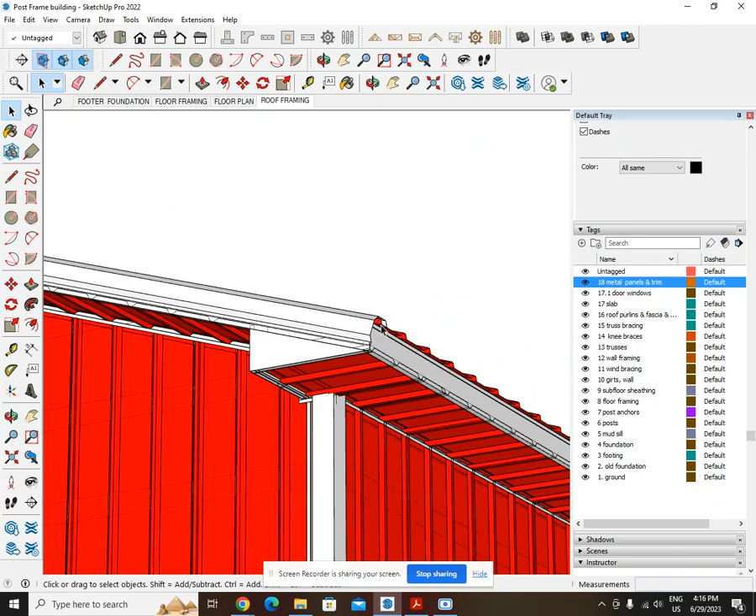It's June 29th, 2023, and I'm showing the plan for this post frame building. Earlier, the only thing that I had done on this post frame building was up to this point in the model, just showing the framing, the foundation, etc. Well, now I have the metal panels modeled in, and I've also got the plan modeled in, which we'll go through page by page, okay?

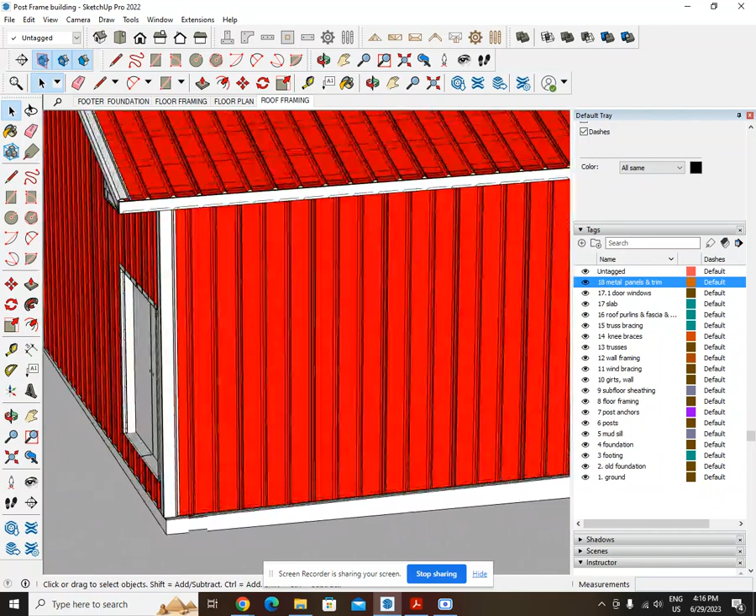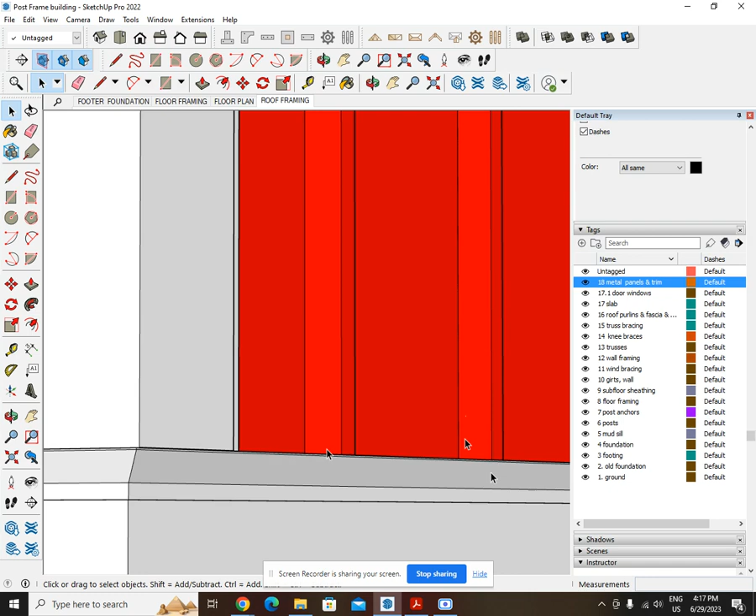So let's go back to the model, and I'll talk a little about these metal panels. Down here on the very bottom is a rodent guard. I looked on the Metal Mart website and found that they make a rodent guard because this building is going to be maybe for food storage of some sort. And so if you can imagine the mice and the rats or whatever insects trying to get up between those ribs and into the building, well, that's what this special piece they make at Metal Mart is for, the rodent guard, okay?

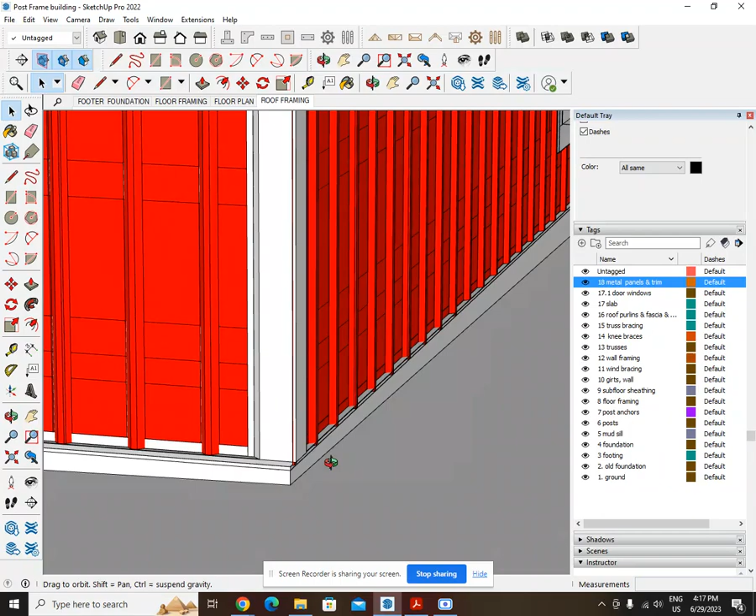And it goes all the way around the building because the building's going to be a little bit above the grade or the dirt, okay? I got the double door modeled in here. I'm not exactly sure how this grade is going to go right now, but it doesn't really matter. This grade might not be the most accurate representation.

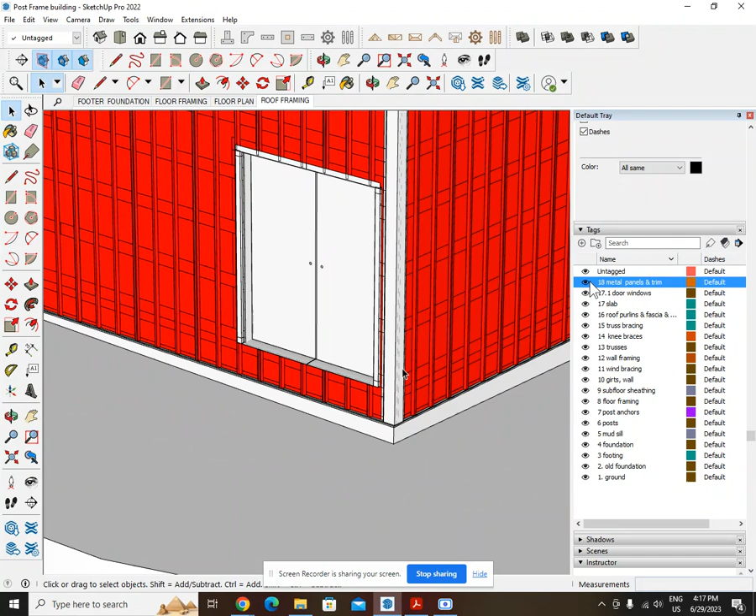So the thing to know is that the door sits on the slab. So let me turn this door off right here. So the door sits on the slab. So whether we have the slab higher or lower, that'll all be figured out once we start building it.

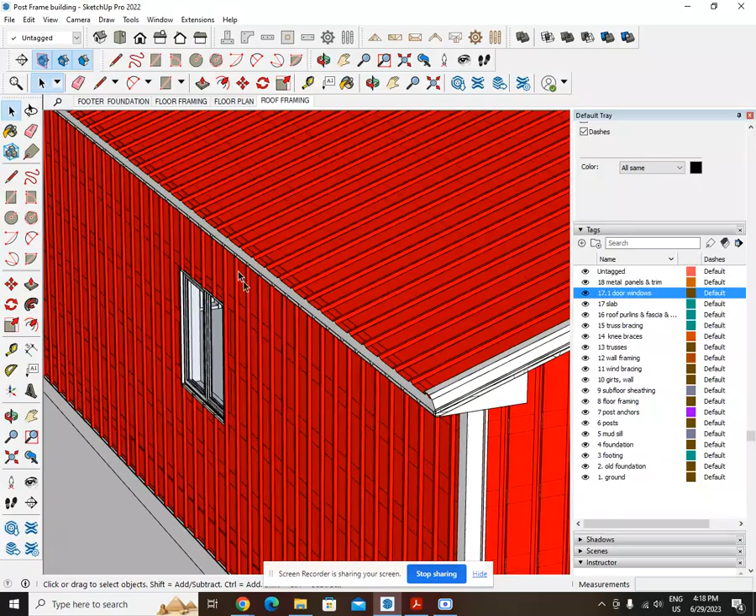Okay. And these windows, I just modeled them in just in case the client wants them. If he doesn't want the windows, we don't have to put the windows in. We can just frame through and do metal panels, but it might be pretty dark in there without any windows. Another thing I've seen is they put the clear panels up here, so then windows aren't necessary, but I just drew the windows in anyway because we're getting ready to send this plan off to the engineer, and I wanted him to see how I'm planning on doing the window headers.

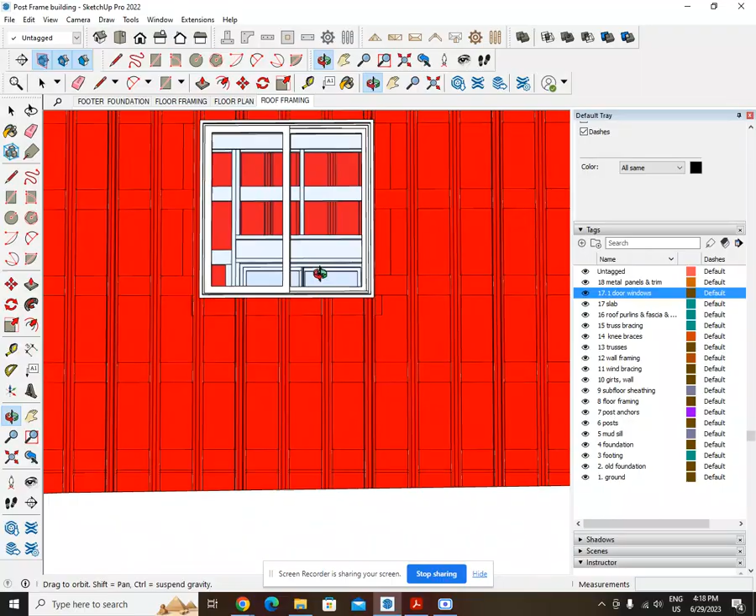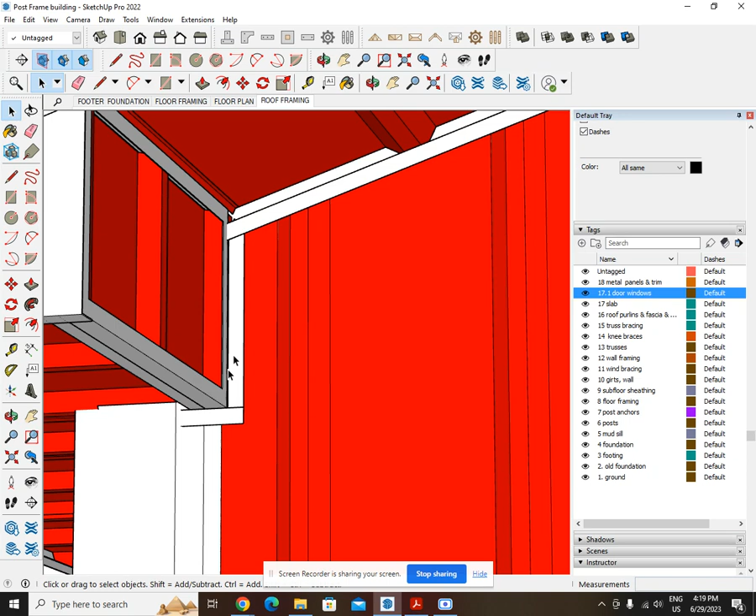Okay. So one more thing about the metal panels is, since we're going to have this 2-foot roof overhang, I've drawn this soffit in like it's going to go. I'm just planning on using the metal panels. And it didn't quite draw out exactly the way I wanted it to with this geometry. I'm not super familiar working with these J channels and these other little metal profiles, so it looks a little bit dirty, and I would never build it like this. Let me show you exactly how this detail is going to turn out that I've built before.

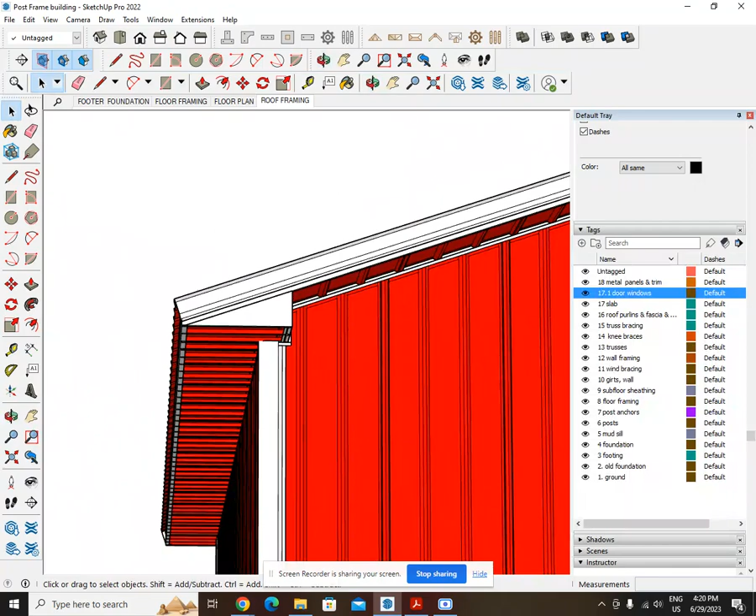Okay, so when we're looking at the model, that's how it looks, and it's a little bit dirty right there, but I just don't have the time to sit there and play with it and make it 100% perfect when I already know that it's going to turn out like that, because that's how I've finished it off before. And the nice straight walls there, the nice straight soffit overhang, that's what we're going for. Okay.

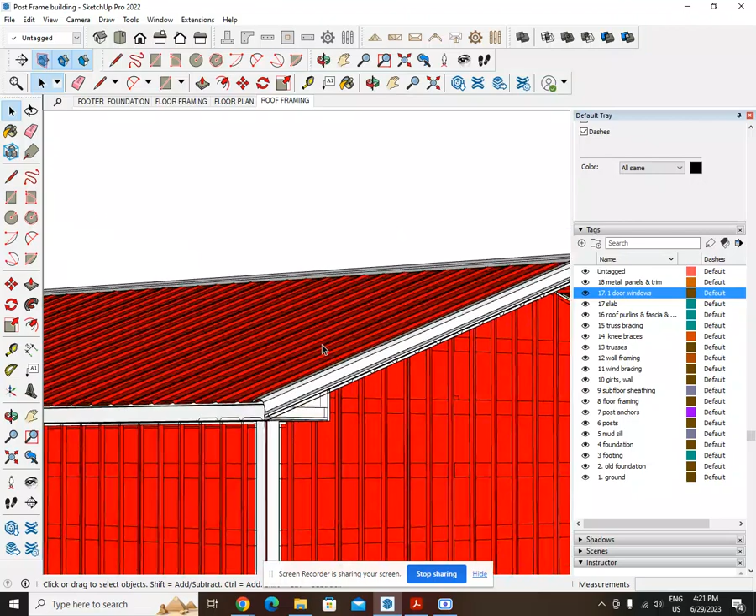So then I'll have this metal cap on there, and of course I would never leave it like this. I would fold it down over here so the bugs and insects and stuff don't get in, but I just can't draw that, and that's not what I'm trying to do here. I'm not trying to draw. This is just for illustration purposes.

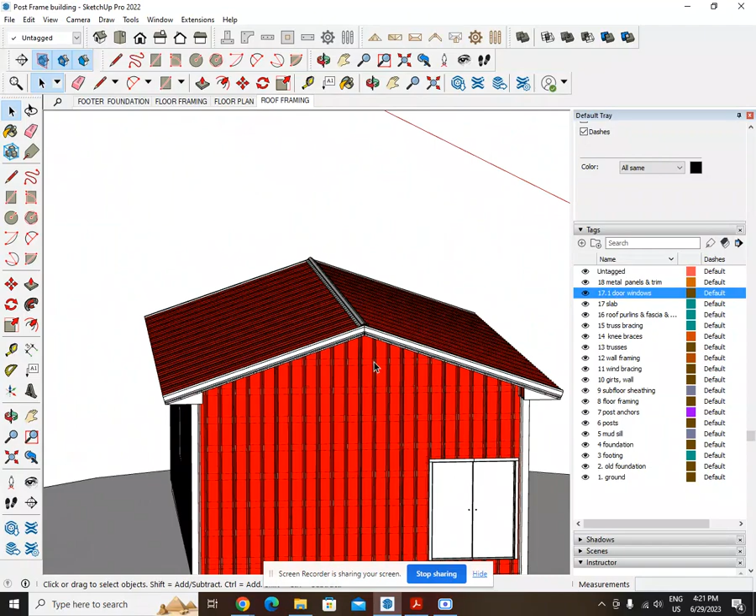Okay, so other than that, having this model is going to give us a really good idea when it comes time to order our pieces. Like even for this stuff right here, you know how they make that double J channel, it's like an F channel or something. I've got all that drawn in.

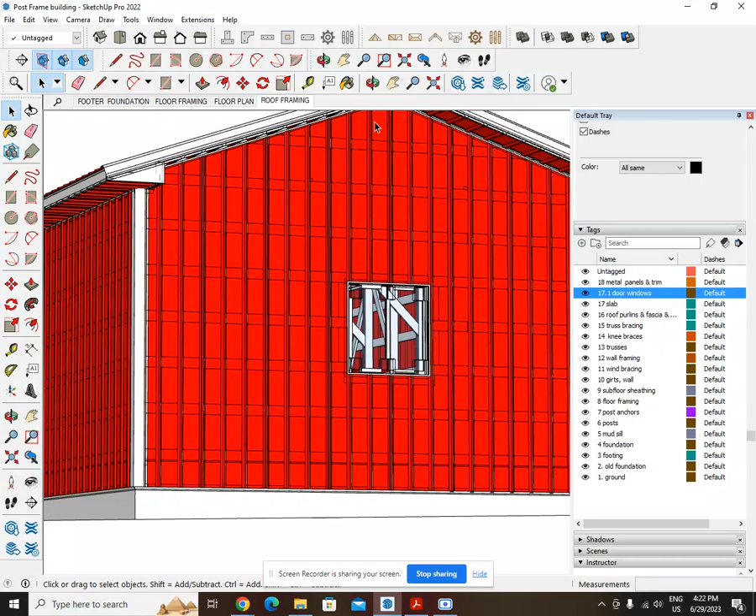So when we go to do our quantities, our takeoff for the metal, then we know pretty much exactly what size panels to get for the wall and exactly what size roof panels to get. And then we'll just order these panels a little bit longer and cut them down on the angle. But the model is what's going to guide us through when it's time to do the metal purchase.

Okay. So additionally, with having the panels modeled in, I'm able to now develop the 2D plan for the engineer. So this is page 1. I've developed an 8-page plan, 3, 4. Okay, there's my 8 pages, and we'll go through these. And this is what's going to get submitted to the engineer. And then once he engineers this, then we can build it.

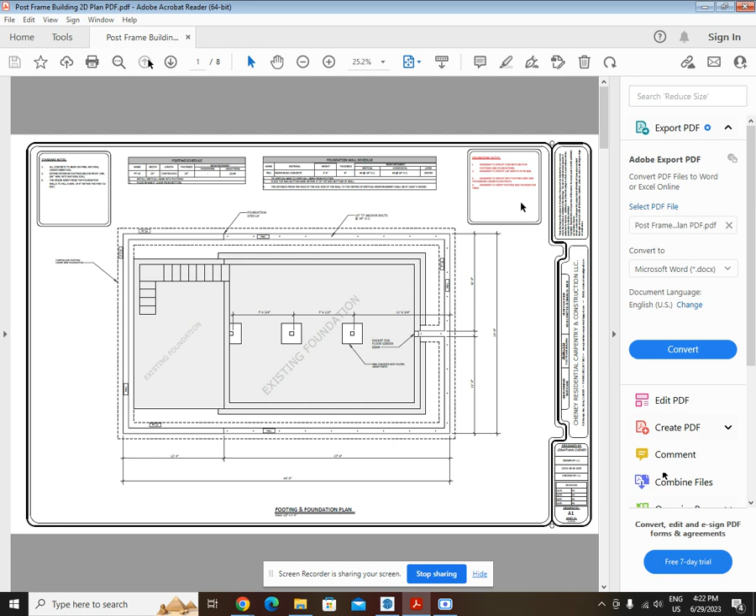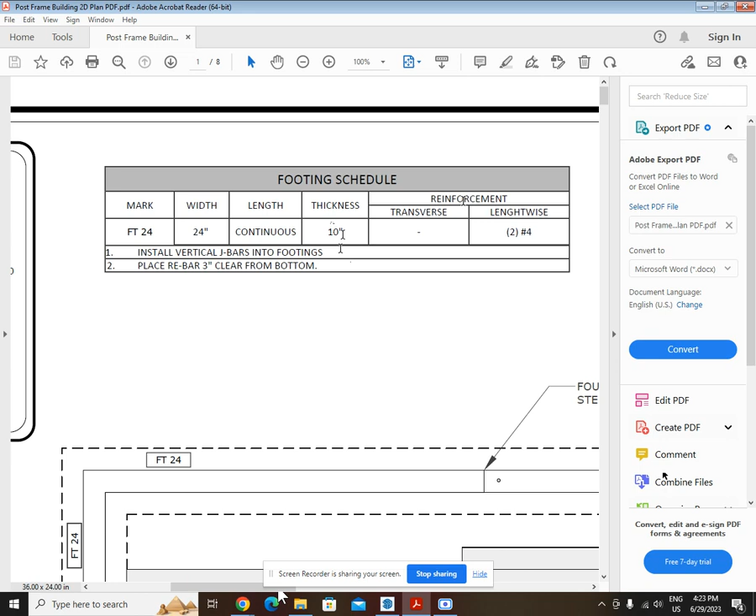Okay. So here's page 1. Let's get up to 100% view. I just put some little notes on here. And I did a footing schedule. I'm thinking we're going to be a 24-inch width, 10-inch thickness. That's pretty standard, and it shows my rebar. I'm thinking that's what it's going to be, okay?

But if I'm wrong, then I've included a note over here for the engineer. Engineer to specify concrete mix for footings and foundations. Engineer to specify lap length for rebar. Engineer to specify spot footing sizes and thickness under floor posts. Engineer to verify footing and foundation table.

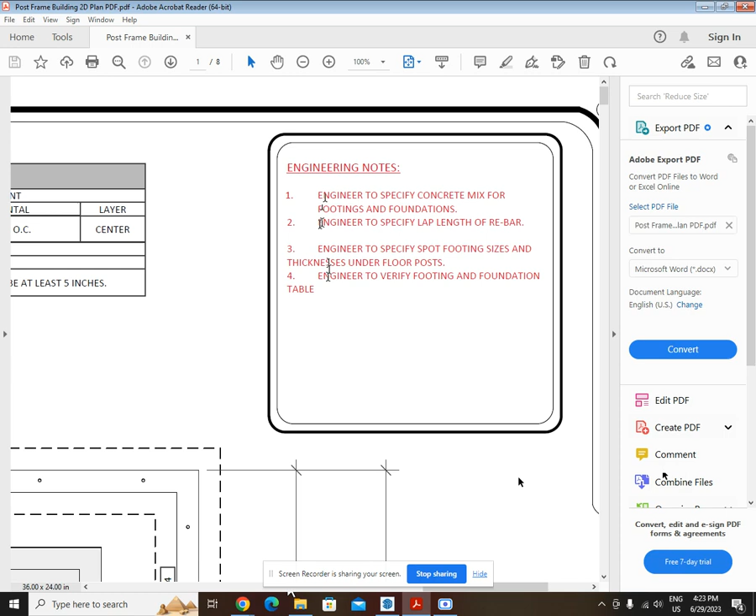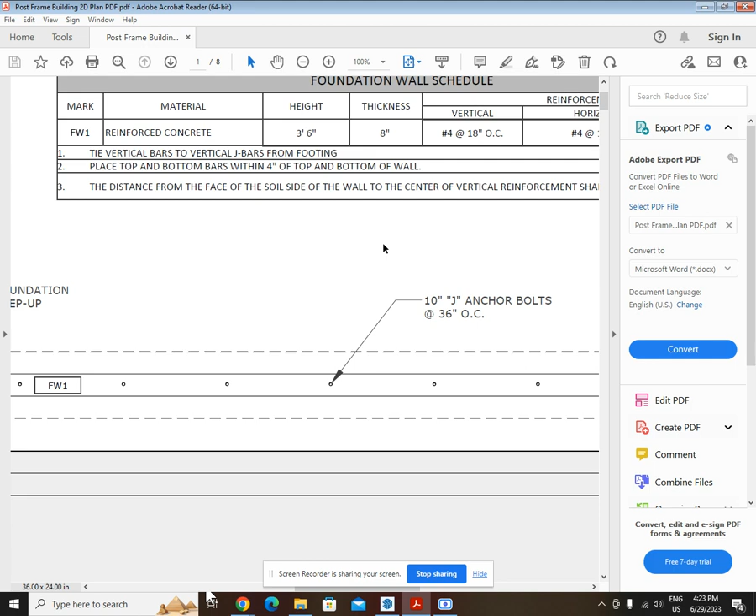So if the engineer doesn't like what I'm calling out for the footers and the foundation wall, then he can change it for us. Because I'm not qualified, I'm not an engineer, but this is just kind of something I've seen before. So he's going to put his stamp on this, and then once we have it stamped, we know it's good to be built. Okay.

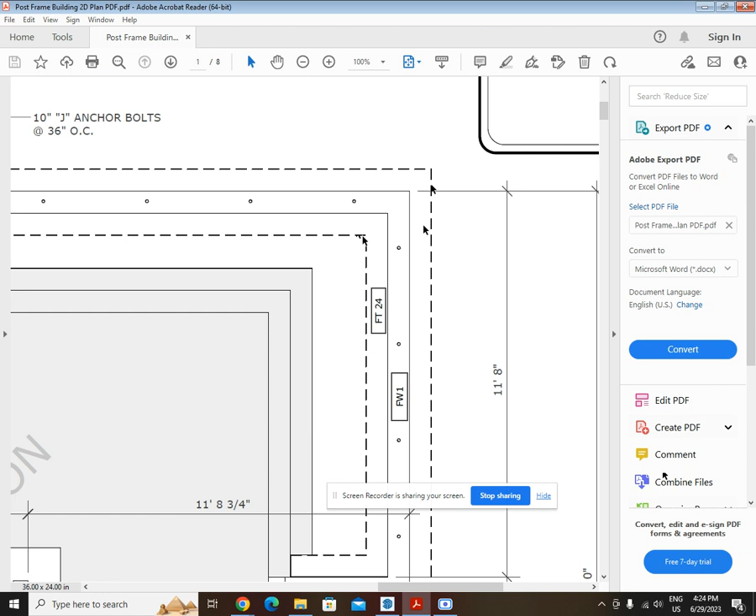So let's go over here and let's kind of look around this plan. The dashed line just shows the footing, and then the other line is the foundation. This is showing my anchor bolts. I've got the measurements, what the building's supposed to come out to, and let's see, what else do I have on this page? It just shows that part of it's the existing foundation. It shows the spot footers, the beam pocket.

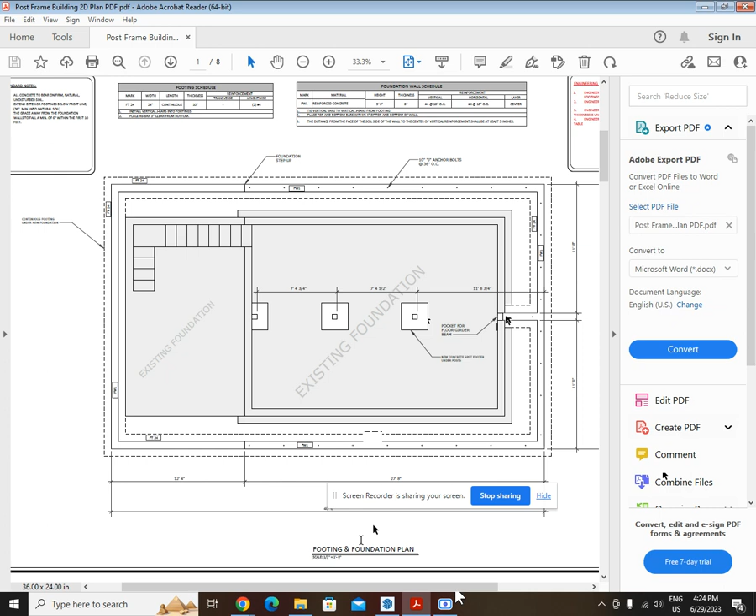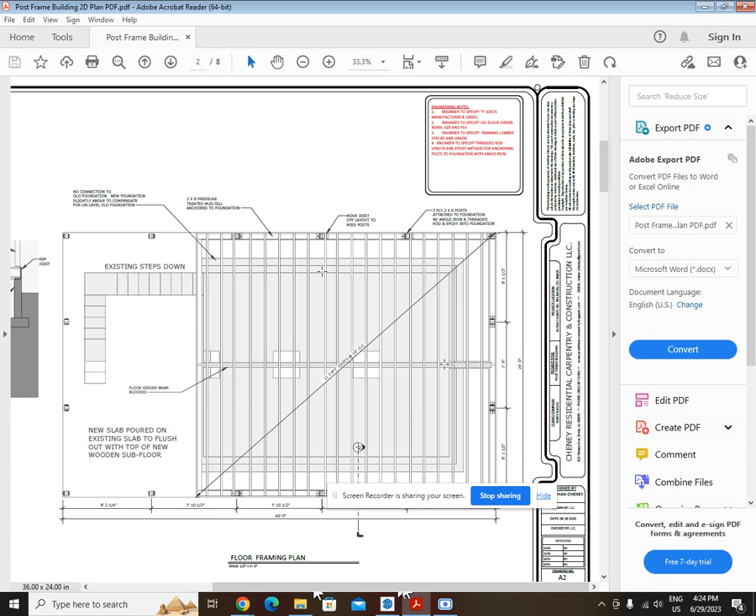Okay. So on the next page, page 2 shows the floor joists. I'm just telling the engineer that we want 11 7/8 joists, 16 on center. He's going to tell me what size they need to be and what series. He's going to tell me about the beam, the girder beam for the center of the joists. And he's going to tell us about the threaded rod and the epoxy connection for when we anchor our posts to the foundation.

Okay. Then I've got a little section over here, so he's going to understand what's going on with this. The old foundation's right here.

And we want to build our new foundation outside of that a little bit higher so that my new floor floats over that, because in the picture it looks all fine and dandy, like I can just rest the floor on the old foundation. But I know from my experience that those old foundations are not level, and I'm not going to sit there and mess around with the old foundation when I know it's not level. So we're just going to build above it.

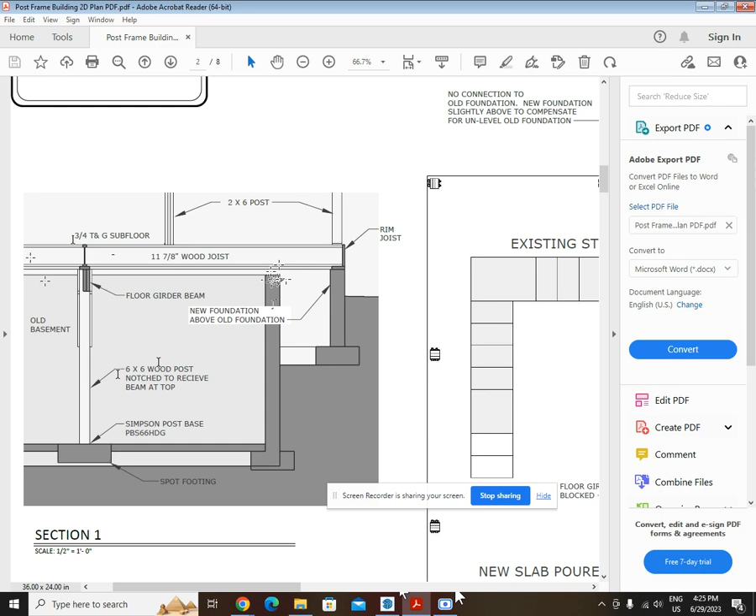And on the mid span, it's going to be held up by this new wood beam and this wood post. And the anchor that I want to use is the Simpson post base. So once the engineer sees all that, if he has a different anchor in mind, then he can call it out and we can change it. Okay, let's look at the next page.

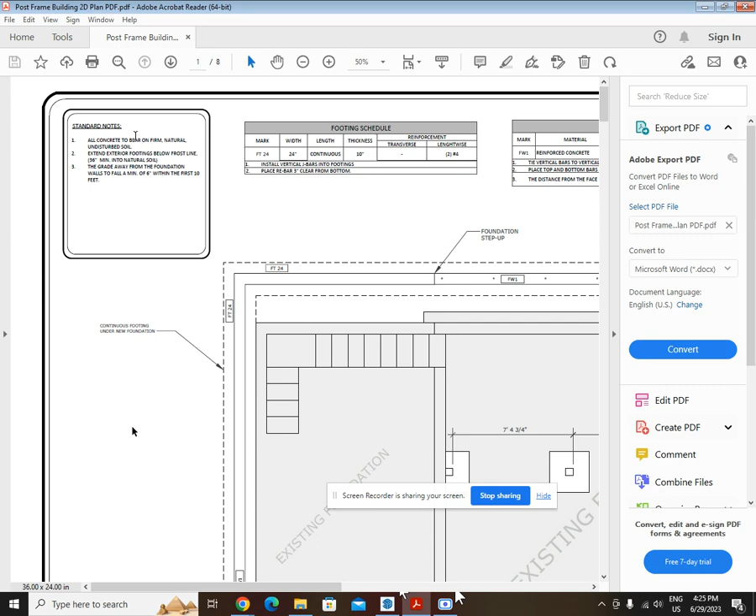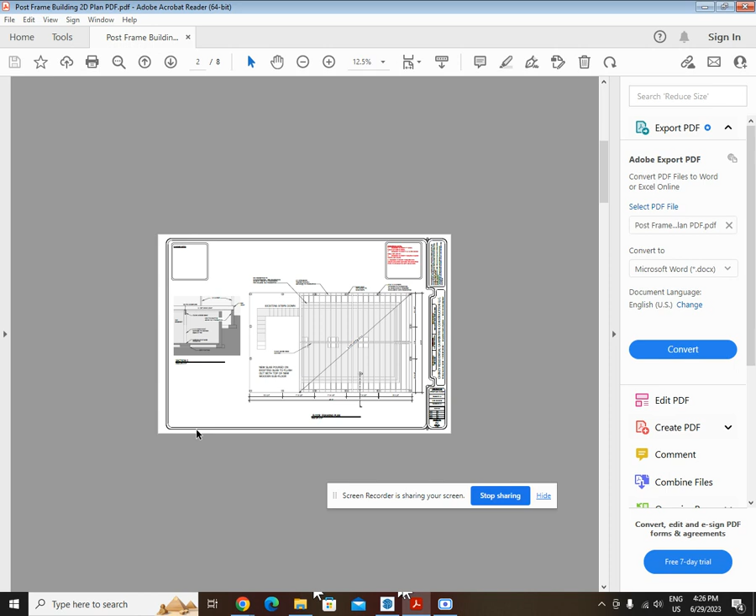I think I went the wrong way. So now I'm on page 3, and this just shows the floor plan, which there's really nothing to this floor plan. It just shows, if I can, oh, I better stop moving my cursor like that. Okay, sorry, I'm having difficulty zooming on this. Be patient with me. All right, let's go to the next page.

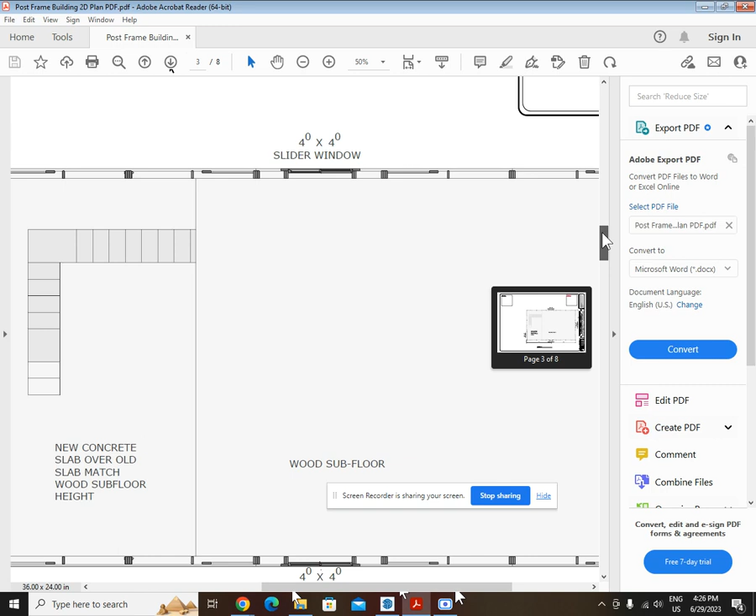So the floor plan, it just shows where the windows are, just basically they're centered, and shows where the door is. And again, as I say, if those windows aren't going to get put in, it's not a problem. They can be framed over. Now let's look at the next page.

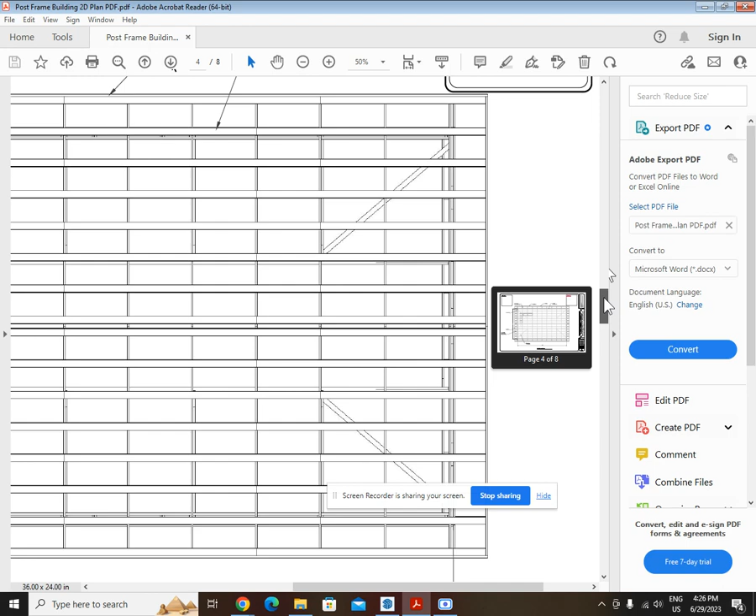This is my roof plan. And I'm just telling the engineer that there's going to be subfascia, 24-inch overhang, purlins on the roof, 24-inch on center. So all these little notes I've put on showing that there's going to be trusses, and then my truss bracing. So that's the roof plan. The next plan is, let me see, let me move this little thing out of the way.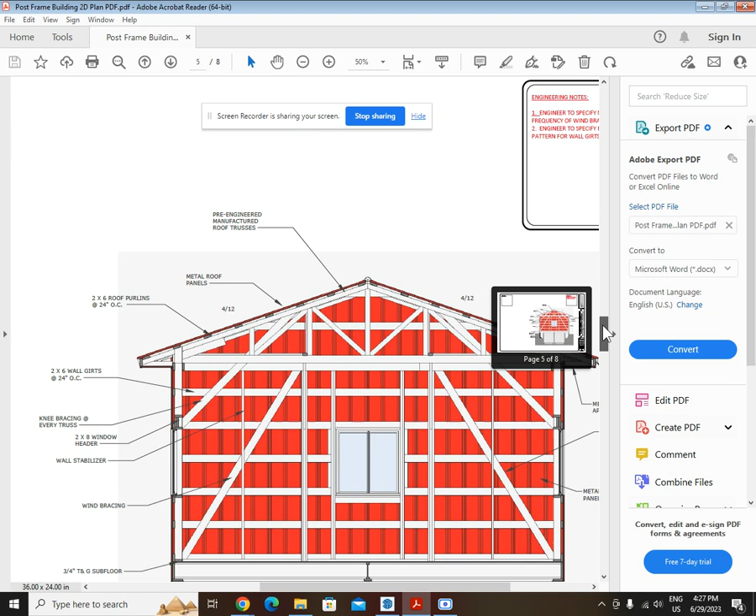The next thing is, this is a section. Okay, so it shows if the building was cut on the inside, this would be what it would look like on the inside. I'm showing my wind bracing, my purlins, these are my panels, my knee bracing, trusses, everything right here. So he shouldn't have a question on how we're planning on building this.

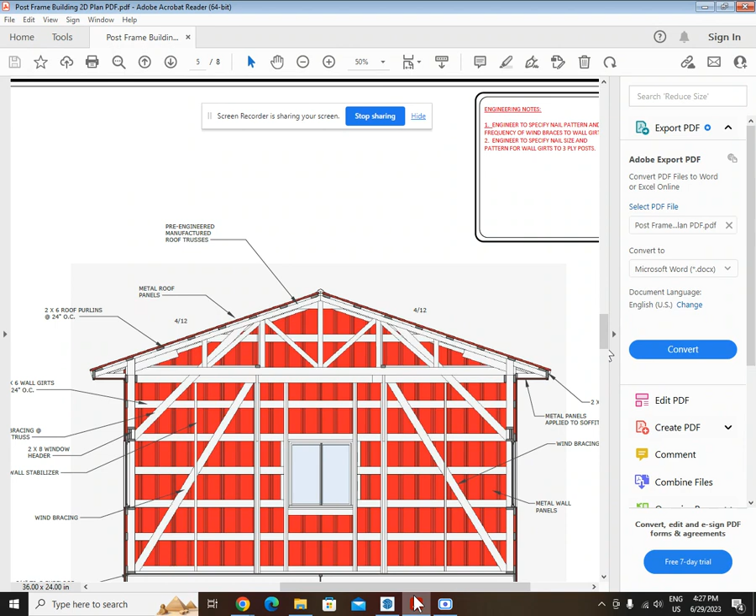He just needs to specify certain things that I'm asking for, like up here, if he just looks at the red, then he'll tell us all things like our nail patterns on the girts and information about the 3-ply posts and things like that. Okay, so let's look at the next page. And then here's another section of the building cut the other way.

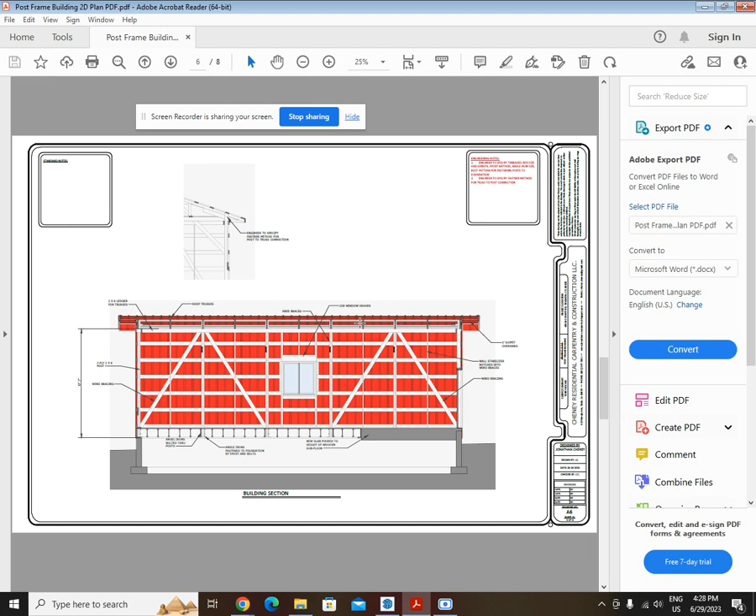And this shows more of the wind bracing and shows the girts and how the trusses go. Let's look up here. See, so the trusses are sitting on top of the posts, and then they're anchored in that way. And the knee braces. Planning on a 2x8 window header.

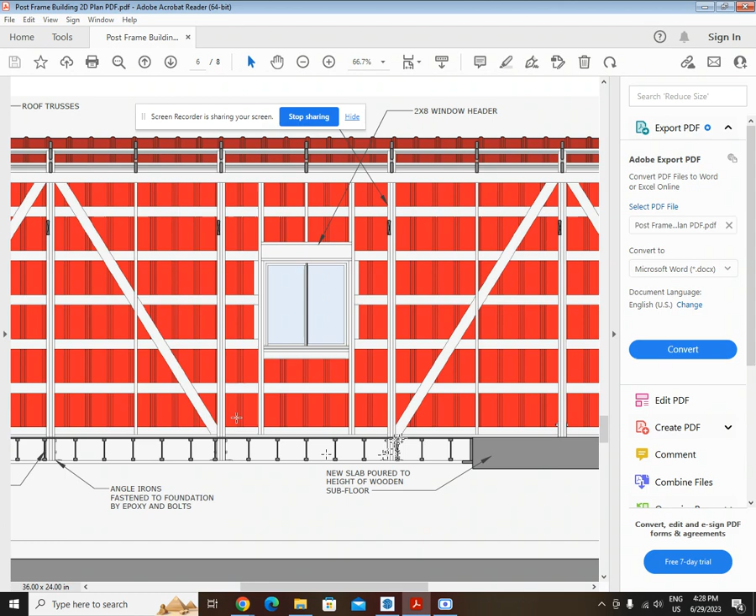So, and that shows how the building goes on top of the, I'm not going to say on top of the floor, because actually the posts sit on the foundation and the floor is basically framed around the posts, just like it's shown here. Okay. And this is the new slab. It's going to be poured on top of the old slab up to the height of the wooden subfloor. Okay.

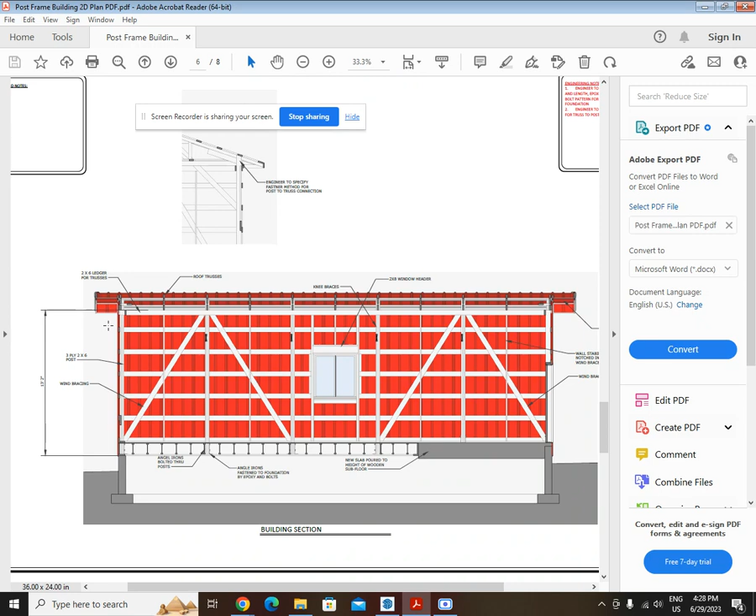So the building comes out to about 13'2" from the foundation to the top of the wall. He'll kind of need to know that information. And I'm showing these intermediate wall stabilizers notched into the wind bracing. All this information is on the plan.

So there's the plan that I drew for the engineer, the post frame building. It's out of my hands now. All I have to do is have the client submit it to the engineer and just wait on him. And then once we get the stamp, then we can go ahead and build it.